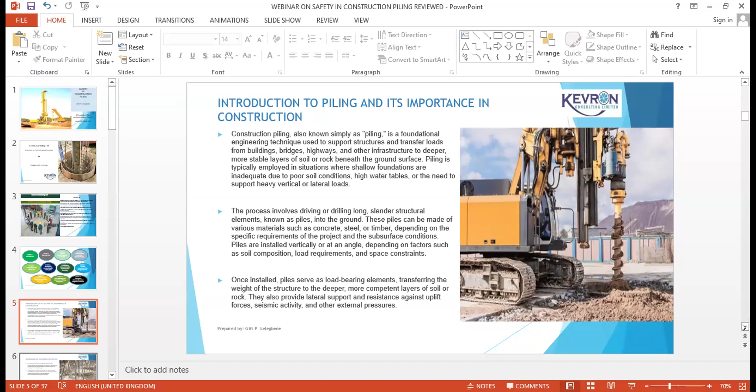It helps for stability of structures. You can hear stories of collapsed structures, collapsed buildings, a lot of them, a lot of stories. These are some of the challenges: structural failures, cracks, due to movement of foundations, so on and so forth. So piling is important because it helps for proper stability of the structure, for safety and longevity of the structures.

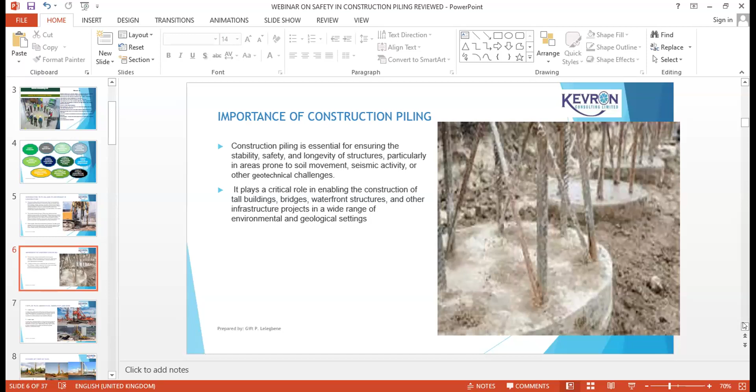So I'll quickly go to the next slide. I think I'm going to be giving room for questions, but let's talk about types of piles. Then I'll give room for one or two questions before we move ahead. I don't just want to go through the whole slide without interacting. I want this section to be a bit interactive. So I'll be talking about the types of piles before we move ahead to the next slide.

So types of piles. Now we have various types of piles, but in this slide, we have to categorize the types of piles by how the piles are driven. We have a lot of piles. We have sheet piles. We have...

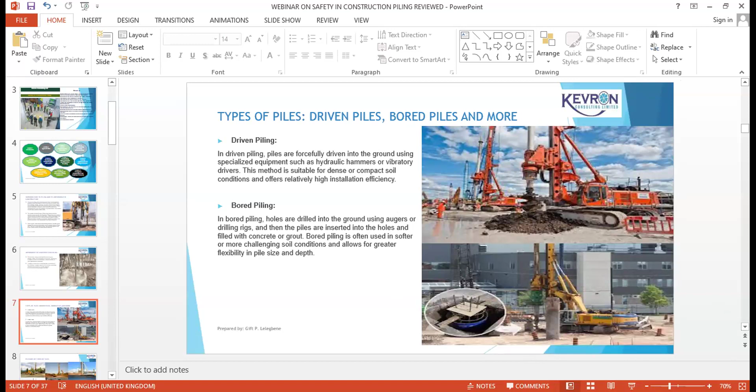Okay, talking about types of piles, we had to categorize them in terms of how these piles are installed. We have different types of piles. We have precast piles, we have sheet piles, we have bored piles. You can name the different kinds of piles. We have different kinds of piles, but we decided to streamline them into how they are driven, or how they are installed. Now, the two major installation processes for piles: either they are driven, or the ground is bored or drilled. Then we also have the injection style or injection method.

So talking about driven piles, in driven piling, piles are forcefully driven into the ground using specialized equipment such as hydraulic hammers or vibratory drivers. This method is suitable for dense or compact soil conditions and offers relatively high installation efficiency. So when you go to construction sites and you see a vibro hammer fixed to a sheet pile and it vibrates the pile into the ground, it's also called a driven pile.

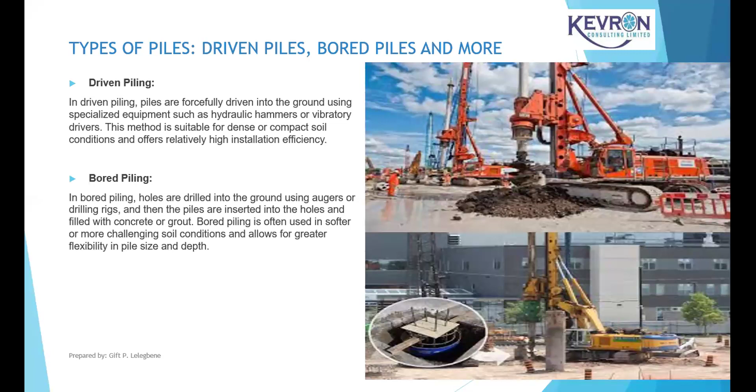Okay, in absence of any other question, I'm going to move ahead to the next slide. You can see pictures of various kinds of rigs and piling ongoing. To my top left corner, you see what my brother from Ghana was talking about. You can see that's the temporary casing. The rig is connected to the temporary casing, introducing the temporary casing inside the drill hole.

While drilling continues, the temporary casing is going to serve as a retaining wall while you drill inside, and they keep pushing the temporary casing down into the earth. Then the next picture at the bottom, you see a precast piling rig trying to lift a precast pile, an already fabricated concrete pile on the ground, and it will pick it up, take it to the piling point, and start hammering it into the ground. You can see some of them that have been hammered into the ground.

If you look at the bottom picture at the middle, you see piles that have been installed on the ground. These are similar to the ones that were done in Dangote Fertilizer in Nigeria. They had areas they did precast piles like this, and they had areas they did the bored piling where you have to drill into the ground. The bored piles are cheaper compared to the precast piles. Precast piles are more expensive for installation.

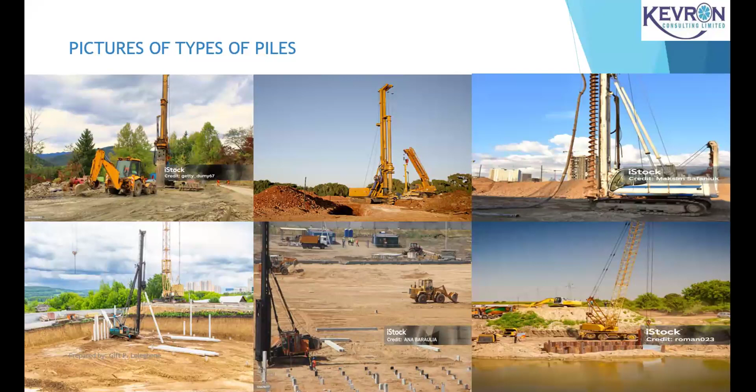So that is a quick one. We have pictures of other kinds of rigs depending on the type, but these are the common ones you see in every massive construction site, every day, every time. So let's quickly move to the next picture here. We have factors influencing the selection of piles.

Load requirement and environmental consideration. So this comes to the question my friend from Ghana asked this morning. The soil condition. Remember, I spoke about the soil condition: the type of the soil, the density and stability of the soil at the construction site significantly impacts pile selection. Different types of piles are suitable for different soil conditions. For example, driven piles may be more appropriate for dense soil, while bored piles are often used in softer or more variable soil conditions. So, selection of the type of piles that needs to be installed depends on the type of the soil, the density, the stability of the soil in that particular construction site.

Another requirement is load requirement. What is the load required by the pile to carry? The anticipated load that the piles will need to support determines the type, the size, the spacing of the piles. You know, I gave an example of bridges. You can see the sizes of those foundations of those bridges. Some of them are 1,000 diameters. Some of them are 1,500 diameters.

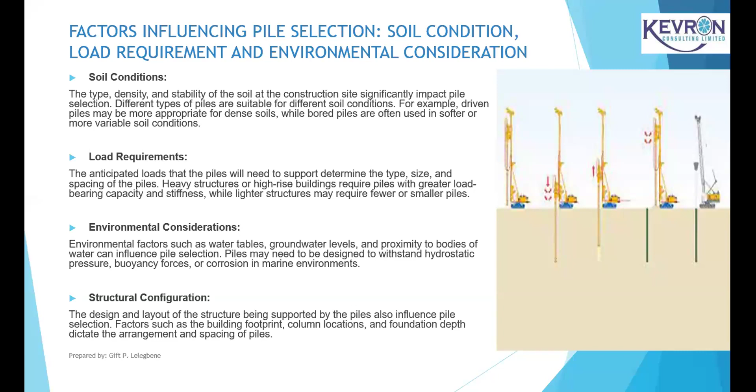The environmental consideration also: environmental factors such as water table, groundwater levels, proximity to bodies of water can influence pile selection. Piles may need to be designed to withstand hydrostatic pressure, buoyancy forces, or corrosion in marine environments. So these are some of the factors that you consider in pile selection. Structural configuration. What's the structure like? The design, the layout of the structure, the support system. So these are some of the factors that must be considered during pile selection. This is always done in the planning stage. In the planning stage, they consider all these factors. Factors such as building footprints, column locations, foundation depth dictate the arrangements and spacing of piles. So let's go to the next slide.

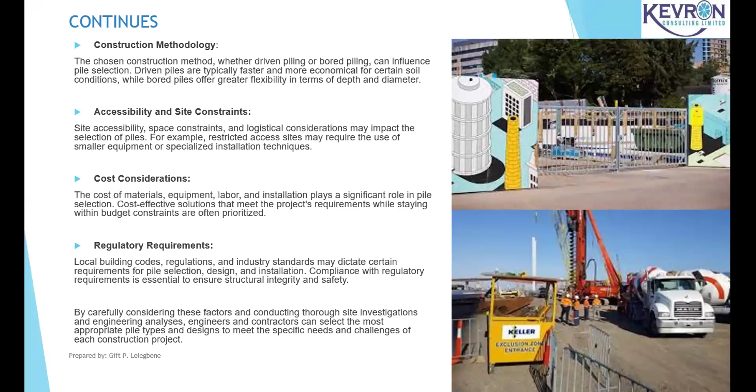Sorry. Understanding the potential hazards. At the top of this thing is, I'm trying to see if I can move it. Sorry.

Yeah, potential hazards with piling activity. Now, structural collapse. Improperly installed or overloaded piles can lead to structural collapse, endangering workers and nearby structures. Collapse can occur during pile driving, excavation, or the foundation settlement phase of construction. Struck-by hazards. Workers are at risk of being struck by falling objects such as pile segments, tools, or equipment during piling operations. The high energy impact of pile driving equipment poses significant hazard if safety precautions are not followed.

Now, I'm going to give site experiences of potential hazards in piling activity. I've been in a construction site where part of a segment of a precast pile fell from the top during the lifting process. Now, if someone was close to that operation, someone would have died. So a lot of things could happen. A lot of things could go wrong. So one has to be very, very careful during piling operations.

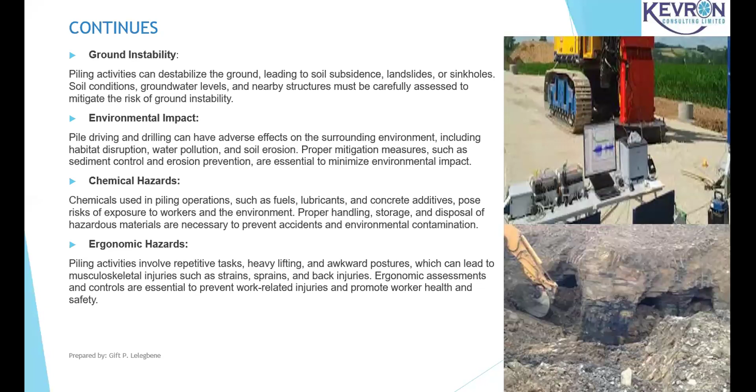Electrical hazards also are involved. Overhead power lines. These are massive equipment with booms, you know. During the movement process, you need to be careful. Electrical hazards may arise from overhead power lines or electrical equipment used in piling operations. Contact with live wires or improper grounding can result in electrocution or electrical fires. This is very, very important.

During mobilization to site, one needs to be very, very careful because these machines are massive. When you get to a place where you have overhead power lines close to work sites, maybe access to work sites, maybe it's an already developed environment, you need to navigate through these areas, and there's a possibility of contact.

So there's a need for you to ensure that safety procedures are applied by getting to the power authorities, ensuring proper LOTO procedures are followed by shutting off power lines, disconnecting the power lines for these machines to pass through before they can reconnect. A lot of processes must be considered.

Then apart from that, do you have underground facilities around that area, so that when you drill down into the earth, you don't get contact with underground facilities, maybe pipes, boreholes, gas pipelines? These are some of the factors that need to be considered while you carry out or before you do your piling activity. The land needs to be scanned for underground facilities to be sure that there is none.

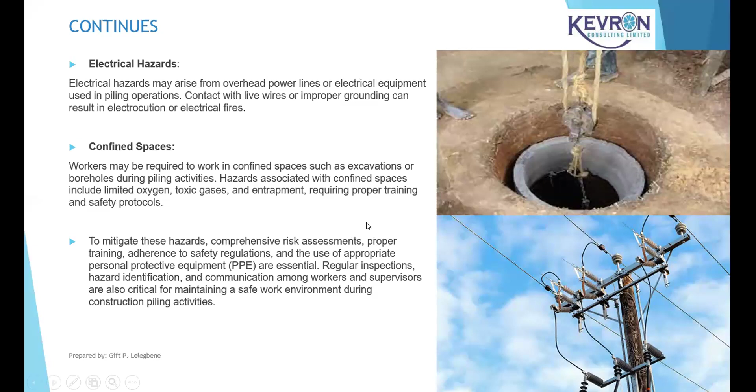So these are some of the hazards involved in these activities. So I'll move to the next slide. I don't know if anyone has a question before we move ahead. Does anyone have a question? Okay, if anyone doesn't have a question, we'll move ahead.

Assessing site-specific risk, factors and proximity to existing structures. I think we've talked about something related to this in our previous slide, but I'll still go through it. Soil conditions. Conduct a comprehensive geotechnical investigation to determine the soil composition, strength, and stability. This may involve soil sampling, laboratory testing, and analysis of geotechnical reports.

The reason for this is to identify any soil anomaly or problematic conditions such as soft soil, expansive clays, loose fill, or groundwater presence. You evaluate the bearing capacity of the soil to ensure it can support the load imposed by the piles. Consider soil settlement and consolidation characteristics to minimize risk of differential settlement. So these are some of the factors that must be considered by the engineers before piling can be done.

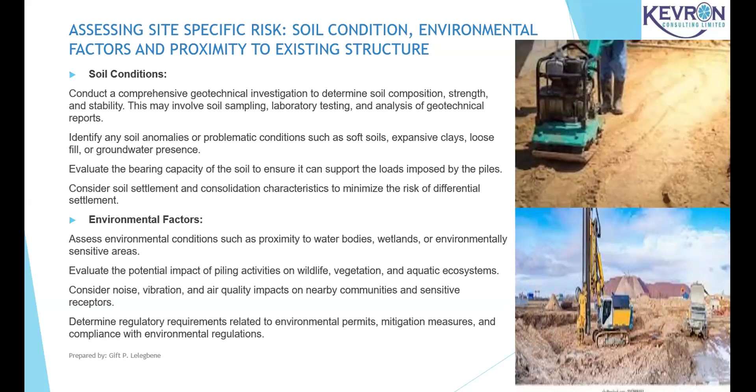I have made mention of all this in one of our previous slides before. These are factors that must be considered before piling can be done. You must carry out a geotechnical soil investigation and get the results analyzed. You must also consider environmental factors that will be impacted, aquatic life, and so on and so forth.

Can someone please mute your mic? I'm hearing noise somewhere. I don't know where. Can someone mute your mic? I think someone's mic is on. Can we all mute our mics, please?

Now, proximity to existing structures. Identify nearby existing structures such as buildings, bridges, utilities, or other underground facilities. I talked about this in the previous slide. I talked about underground facilities, and nearby infrastructure that must be looked at. Assess the potential for ground disturbance, settlement, or damage to adjacent structures during piling activities.

I also gave an example of one of the projects where, while we were drilling, the adjacent building sharing a fence with us started having cracks. These are some of the concerns that need to be looked at. Consider the effects of vibration, noise, and construction-related activities on the stability and integrity of neighboring structures. I've talked about this also.

It's very, very important. Develop mitigation measures such as monitoring, pre-construction surveys, and protective measures to minimize the risk of damage to existing structures. Very, very key. You must carry out a pre-construction survey, monitoring, and protective measures to minimize the risk of damage to existing structures.

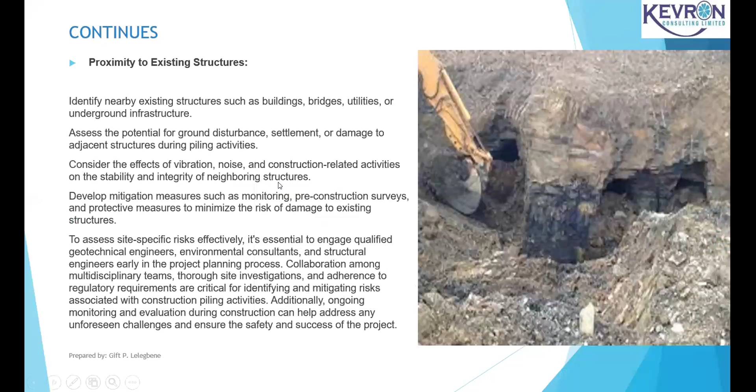So I want us to move ahead, because we have a lot to cover. Okay, I think we've passed here. Okay, I don't know if I can add a voice to what you just said. My hand has been up. I don't know if, yes. Okay, this is Ninaka Adefode.

Yes, I think the last question, Pax, you've actually explained, but I just want to add a voice to what you've said. I think globally, everybody is beginning to talk about sustainability. One of the things he shared was having your HSE plan on how you want to carry out your piling operations safely. And within the plan, what we are doing now is to include sustainability, to show us how we are sure that the piling practices would not deteriorate the environment.

How do we ensure that the piling practices not only benefit our environment, but also contribute to a more resilient and responsible construction process? So we all look forward to building a greener future together. So within the HSE plan, it's very important that as the HSE consultant, we look at how we ensure that the piling process that has been set in place embraces sustainability practices.

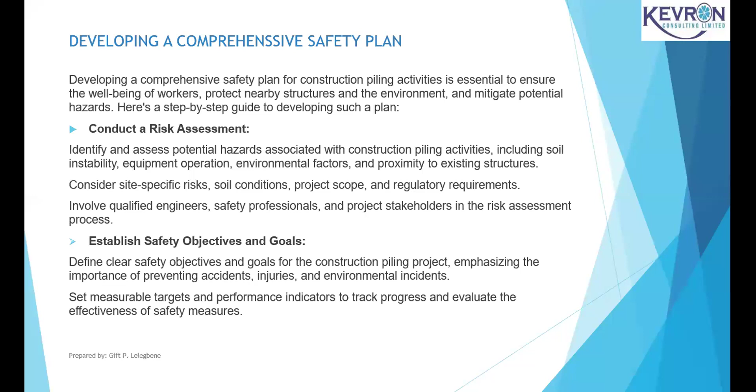You must develop a safe work procedure. It must be captured in your safety plan as a contractor. A safe work procedure must be developed for every part of that activity. How do you handle chemicals? What's your procedure for equipment, certification, training, a whole lot of things. Installation process, post-installation process. All these must be captured in your HSE plan, your safety plan, as a contractor or as a construction company that has a piling contract. You must prove in your HSE plan that you have a safe work process or procedure in place.

For lifting, because you must lift piles, how are you protecting? How are you recruiting your operators? Are they competent? The machines you are using, are they certified by third-party certification bodies, fit for use? Very, very key. What's your installation process? You have method statements clearly spelling out the procedures that must be followed. So a lot of factors must be in place. The roles and responsibilities of workers, supervisors, engineers, and managers clearly spelled out. These are factors that also must be in your HSE plan as a piling contractor.

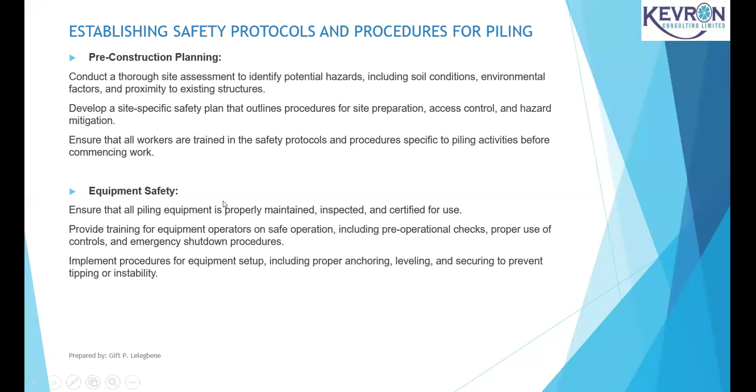Piling installation procedure. You have to develop a standardized procedure for piling installation, including pile driving or drilling techniques, penetration depth, pile alignment. This is where we usually ask contractors for their method statements. The method statements will tell you the methodology you intend to apply, the scope of work, materials to be used, personnel to be used, equipment to be used, number of piles to be driven or to be done. A whole lot of information comes in. So the moment your method statement is available, it captures this information.

So it is very, very important that every piling contractor or piling company must have standardized procedures for piling. And apart from that, there are international codes or standards that must be adhered to. Like for Nigeria, they always follow the British standards. The engineers will tell you, these are the British standards for piling, for this code, for that code, that stand for each regulation or each standard that must be upheld. Most of the times, it is also imputed in your method statement. You see them citing it in certain sections, that these are the standards that we are adhering to. Either European standard for piling or UK standard for this and that. It's always there. It serves as a guide.

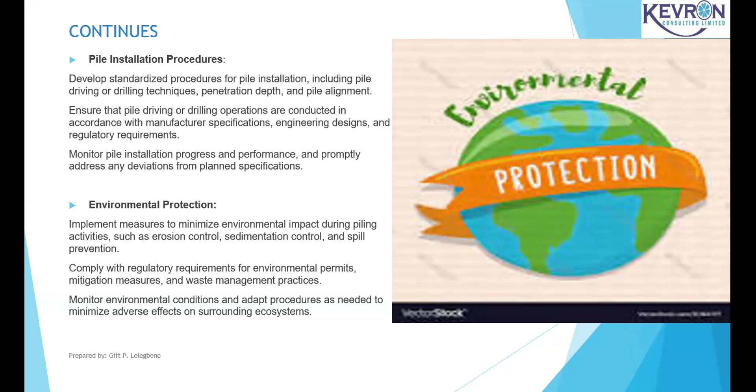These factors are considered. You must have them in writing and you must implement the processes. Even after getting the permits, you must ensure that the process is being adhered to. You must ensure complete compliance. Monitor environmental conditions and adapt procedures as needed to minimize adverse effects on surrounding ecosystems.

Personal protective equipment. This has to do with identifying appropriate PPE requirements for piling activity, including hard hats, safety glasses, gloves, hearing protection, high visibility clothing. Very, very important. Provide workers with properly fitting PPE and ensure they wear it at all times while on site. Conduct regular inspections to ensure that the PPE is in good condition and replaced as needed. It is very, very key. As a piling contractor, the International Labour Organization standard requires that. As an employer, it's also your duty to provide personal protective equipment for your workers, provide the needed training for them, provide a safe work environment, provide safe equipment for them to work with.

So for the PPE, you must ensure that they have the required PPE for the task. Remember, piling comes with a lot of loud noises. They need to wear proper PPE for that activity. Then you need to monitor the conditions of the PPE of the workers. Regular inspection comes in. You need to check. Are their PPEs worn out? Are they due for replacement? What is your plan for PPE issuance for your workers in the project? It must be captured in your HSE plan.

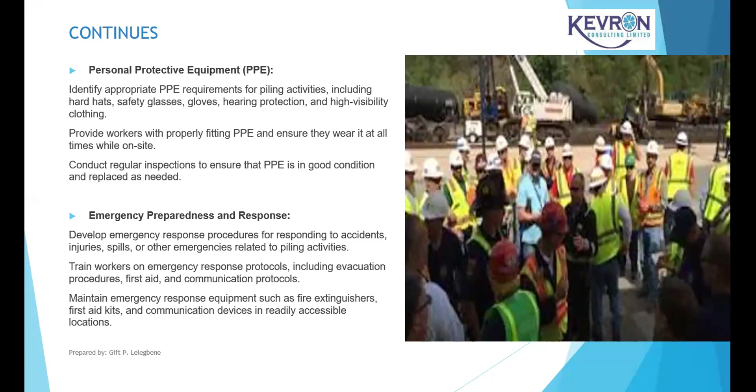Maintain emergency response equipment such as fire extinguishers. How often are they inspected? Are they certified by a third-party certification body? Your first aid kits on site, are they inspected? How often do you inspect them? Or do you have them on site? Communication devices, are they readily accessible? If you are in remote locations, you need a walkie-talkie. These are factors that must be considered.

Communication and collaboration. You must foster open communication and collaboration between project teams, subcontractors, and regulatory authorities to address safety concerns and ensure compliance with safety regulations and standards. Encourage workers to report safety hazards, near misses, and incidents promptly, and establish procedures for investigating and addressing safety concerns. This is very, very important. I think I'm going to dwell on this a bit too.

Do you have a process of reporting hazards identified on site for everybody? Do you victimize people who report incidents on site? Do you have an incident investigation procedure or accident investigation procedure on site to determine the root cause and immediate cause and provide control measures to ensure that such incidents don't reoccur in the future? Do you cascade the learning points to your team from every accident, incident or near miss on site?

Continuous improvements. Do you have an established procedure or system for monitoring and evaluating safety performance throughout the construction piling projects? Do you conduct regular safety inspections, audits, and reviews to identify areas for improvement and implement corrective actions as needed? Do you encourage feedback from workers, supervisors, stakeholders to identify lessons learned and opportunities for enhancing safety practices? All these must be in place.

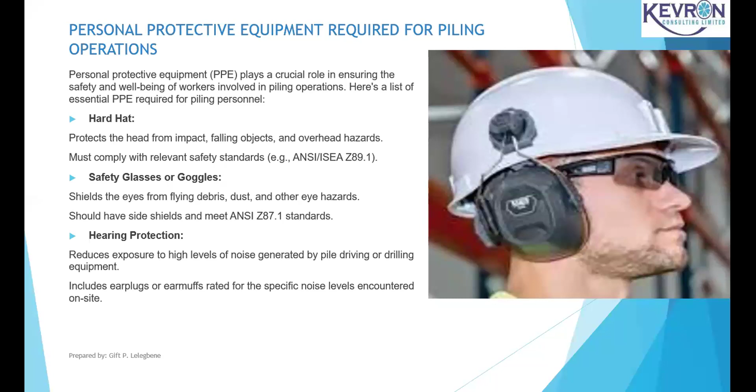Now, hearing protection helps to reduce the high level of noise generated by pile driving or drilling operations. Like I said, they could use earplugs, earmuffs also. They must be of the right ratings. Very, very important. High visibility clothing is also very, very important. It enhances visibility of workers to reduce the risk of accidents, particularly in areas with moving equipment or traffic. Should be reflective and meet the ANSI standards.

Hand gloves help to protect the hands from cuts, abrasions, and chemical exposure during handling of equipment, materials, and tools. We must choose the right or appropriate gloves for specific tasks and hazards, such as heavy-duty leather gloves and chemical-resistant gloves. So depending on the activity the worker is exposed to, there is a need for us to give them or choose the right gloves.

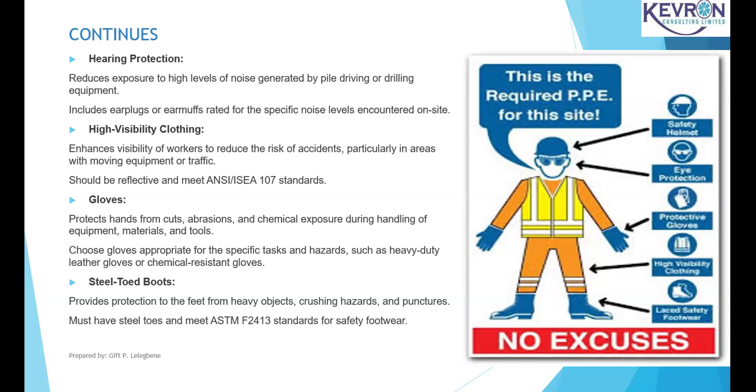Steel toe boots, which we usually call safety boots, as a piling contractor you must provide for your workers, with the right protection for their feet from heavy objects, crushing hazards, and puncture hazards. It must meet the international safety standards for steel toe boots or footwear. You can see a picture of how a piling guy needs to work.

Then respiratory protection guards against inhalation of dust, fumes, or airborne contaminants generated during piling activities. Yes, those guys carrying the bentonite bags, there's always dust from those bentonite bags. What about the chemicals they use for concrete mixing? Inhalation of dust and fumes. They must put on respiratory protection, depending on the type or level of exposure. Could be nose masks, dust masks, respirators, or powered air purifying respirators. So the common ones we have are dust masks and respirators.

Then fall protection equipment. It is very, very important that you have fall protection equipment on site for the piling rig team. There are times they need to carry out maintenance activity on the mast, on the rig. They have to go up. If you don't have a mobile elevated work platform, the worker must use fall protection equipment like a full body harness. When they are at the top of the mast, they need to anchor properly to restrain them from falling down.

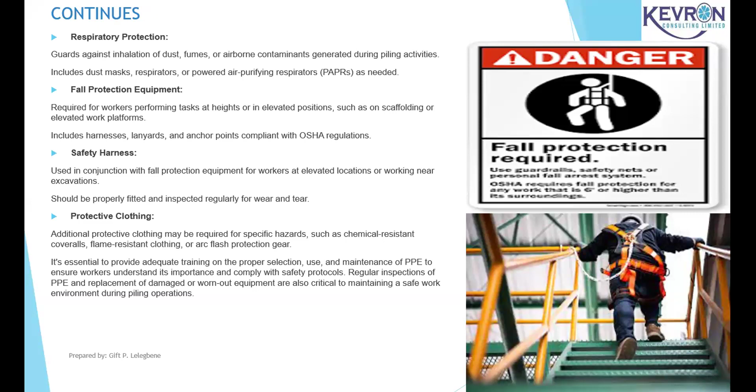You must have a competent operator who knows how to use that machine. An operator may have used a particular machine. We have different kinds of machines. He's not conversant with this kind of machine, or it could be the same kind of machine, but with a different make. So there's a need for these guys to be familiarized.

They need to conduct pre-operational checks to ensure the rig is in good working condition, including inspection for loose or damaged parts, checking fluid levels, verifying proper lubrication. Ensure the drill is securely anchored or supported to prevent movement or instability during operations. Follow safe drilling practices, including maintaining a stable footing, positioning the drill at the correct angle, and using appropriate drilling techniques. Use personal protective equipment, including safety glasses, hearing protection, gloves to protect against hazards such as flying debris and noise exposure.

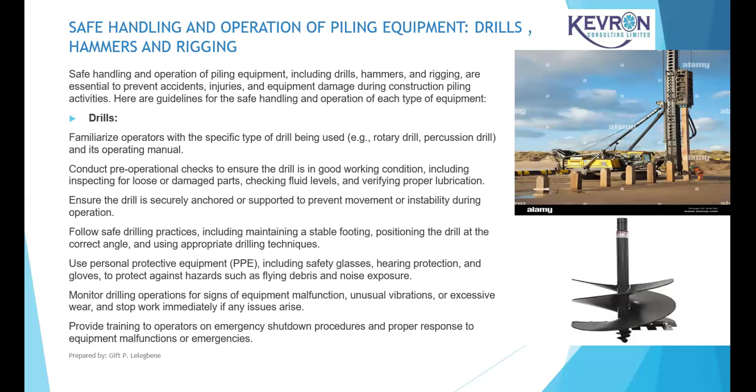Monitor drilling operations for signs of equipment malfunctioning, unusual vibrations, or excessive wear, and stop work immediately if any issues arise. Provide training to operators on emergency shutdown procedures and proper response to equipment malfunctions or emergencies. Then hammers for driving piles. Ensure operators are trained and certified to operate pile driving equipment, including hydraulic hammers, diesel hammers, or vibratory hammers.

Conduct pre-operational checks. Conduct pre-operational checks to verify that the hammer and associated equipment are properly assembled, secured, and aligned. During the piling operations, we were trying to assemble the hammer, and the hammer dropped. The hammer fell. These are things that could happen. One has to be very, very careful.

There was a time we were hammering, and the hammer got stuck to the pile, the head of the pile, the cap of the pile. During the process of trying to pull it off, the sling snaps. These are things I've experienced firsthand on site. So experience from operators is very, very key.

I've also experienced when during removal of auger and concrete casting, the auger got stuck. Operator was trying to pull out instead of rotating anti-clockwise. The sling snapped and struck someone almost to the point of death. These are near-death experiences I saw on site. Nobody told me, I was there when it happened. So they need to be careful.

Communicate with spotters or signalers to coordinate pile driving operations and maintain situational awareness. So the rig assistants must all have a way of communication between themselves and the operator. They must monitor pile driving progress and adjust driving parameters, e.g. stroke rates, energy, as needed to achieve proper penetration and alignment.

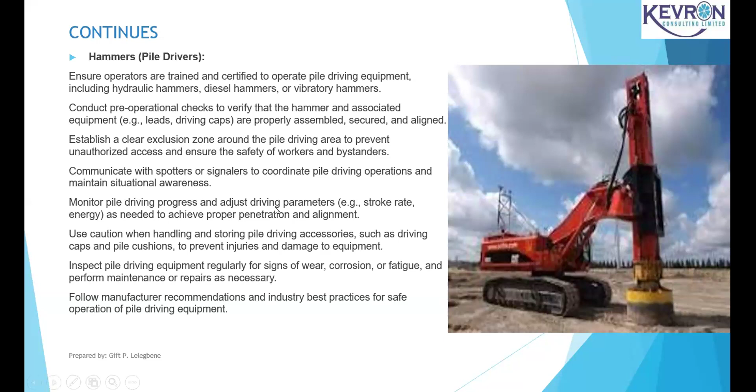Inspect pile driving equipment regularly for signs of wear, corrosion, or fatigue and poor performance, and perform maintenance or repairs as necessary. You have to follow manufacturer's recommendation and industry best practice for safe operation of pile driving equipment. Then rigging, we also know that if you're doing piling operations, you must use lifting gears, rigging gears. There are times you need to lift piles.

Very, very important. Ensure rigging equipment such as slings, shackles, and lifting hooks is inspected, certified, and rated for the intended load capacity. Riggers are trained. Operators on proper rigging techniques are also trained, including selecting appropriate rigging hardware, securing loads, and balancing weight distribution. It's important the third-party certification body certifies your lifting gears used by the piling rig team for lifting piles if there are precast piles, is very, very important.

Lifting eyes, safety lashes, all in place. Tag lines for lifting reinforcement, lifting precast for controlling the load, they are all important. They must use tag lines or guide ropes to control the movement of loads during lifting and positioning operations. Inspect rigging equipment prior to use. Ensure that defective lifting gears are removed from use. Ensure that only third-party certified lifting accessories are used.

Avoid overloading of rigging equipment beyond its rated capacity, and ensure loads are properly balanced and secure to prevent shifting or instability. Follow established hand signals or communication protocols to coordinate rigging operations and maintain safe work distance between personnel and loads. Monitor rigging operations for signs of stress, fatigue, or failure, and take corrective actions to mitigate risk and ensure the safety of workers and equipment.

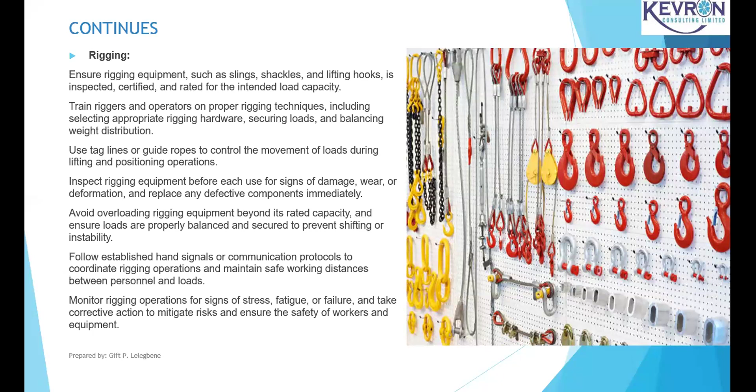Emergency preparedness and response protocol, evacuation procedure, first aid rescue teams. I think we've also talked about this before. There is a need to establish clear evacuation routes, assembly points for workers to gather in the event of an emergency. Do you have muster points on site? Do you have emergency exit routes? Very, very important. Post evacuation maps and signs in prominent locations around the work site, indicating primary and alternative evacuation routes.

You have pictures of your designated first aiders, your fire wardens with their contact details at strategic locations. You have a site layout map with emergency routes clearly specified. You have emergency contact numbers displayed at strategic locations on site. These are things that need to be considered, very, very important on site. Your clinic, your ambulance driver contacts, your emergency response team lead contacts, all these must be on site.

Designated evacuation coordinators or marshals to oversee evacuation efforts, account for personnel and communicate with emergency responders. Conduct regular drills and exercises to practice evacuation procedures and ensure workers are familiar with emergency protocols. So these must be in place all the time.

First aid: you must provide first aid training for designated personnel, including basic life support. You have designated first aiders on site who are trained and certified either by Red Cross or by other training bodies. Then you have first aid kits on site. You have automated defibrillators on site. You have emergency medical supplies accessible.

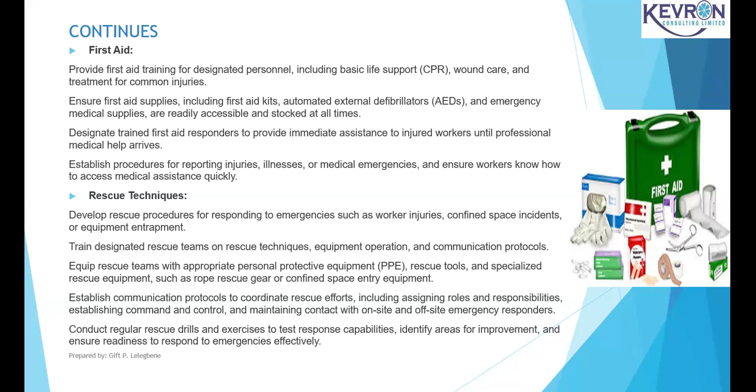Conduct regular rescue drills and exercises. Ensure there's a test. You carry out your drill test on site to identify areas of improvement. Communication and coordination: you have established communication channels and protocols for reporting emergencies on site, summoning assistance and coordinating response efforts. Ensure all workers know how to access emergency contact information, including phone numbers for emergency services, fire services, supervisors, and designated emergency responders on site. You have these numbers displayed on site.

Implement a system for communicating emergency alerts, warnings, and instructions to all personnel on site, including use of audible alarms, visual signals, or two-way radios. Coordinate with local emergency services such as fire departments, paramedics, and law enforcement to facilitate rapid response and support during emergencies.